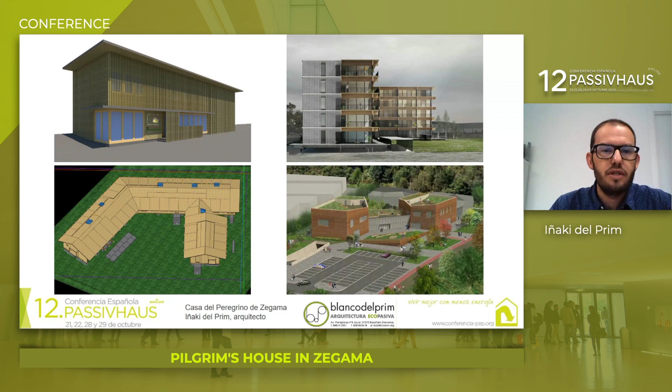This research has been carried out in 4 buildings, the first built in 2016, both our own projects and collaborations with other architects. More projects are undertaken entailing greater complexity and larger scale, using solid wood. The majority have been certified, in fact all of them, and some are in the tender or construction phase. In this case, I'm going to talk about the Pilgrims Hostel in Zegama.

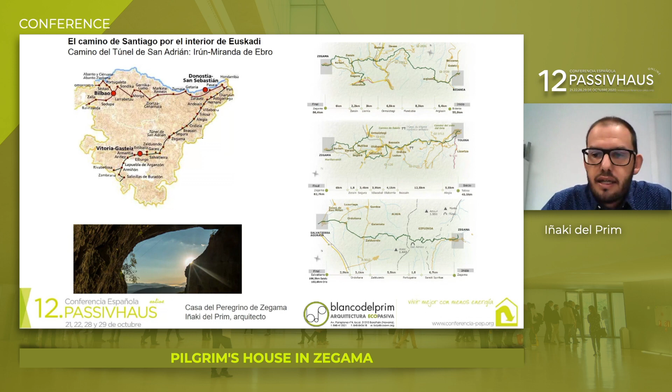Zegama's location was one of our first concerns, given its very specific climatological conditions. It's relatively close to the coast, at an altitude of approximately 300 meters above sea level. So it's a very mountainous landscape with a mountain climate.

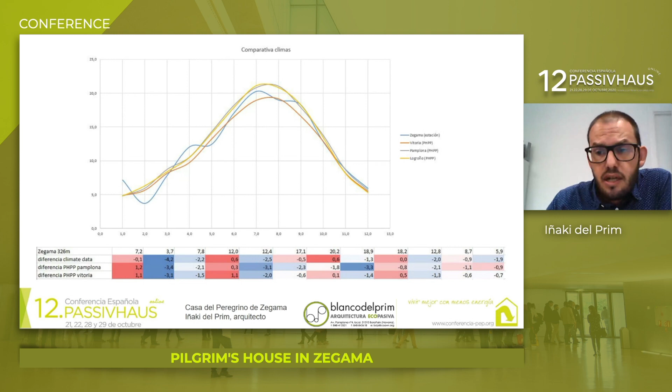We had to study the climatological conditions for this project, comparing real weather databases for Zegama with different climate profiles indicated in the PHPP and other profiles downloaded from general databases. This prompted us to determine that the climate profile in Zegama was almost the same as in Vitoria. Together with Burgos, these two areas have some of the most severe climate conditions in the Iberian Peninsula, both in terms of temperatures and radiation levels.

In terms of conditioning factors at the outset, the local town council, through work with the municipal architect, wanted the building to comply with passive house requirements to fulfill their commitment to sustainability and provide guarantees on the quality of municipal investments. Another conditioning factor was that it had to be made of wood. The plot was located next to the Wood Museum in the municipality, a museum that's fairly famous in the district. So, to complement it, they decided it should be made from local wood.

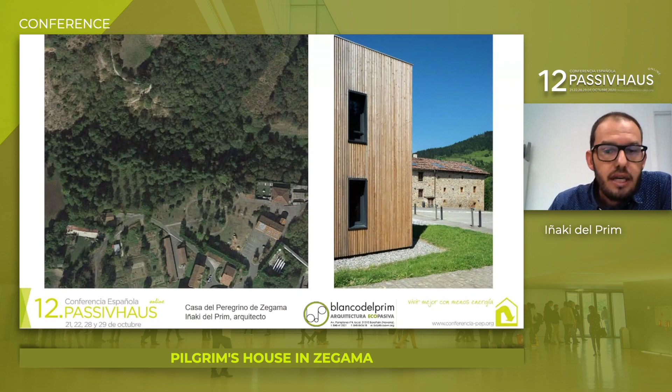It was located at the entrance to the natural park, marked there by the cursor. So towards the left of the building is the Aizkorri Natural Park, with many different paths. This building would serve as a gateway to the park, marking the beginning of the route into the mountain range of the district.

The building program was very easy to understand. It was for a pilgrims hostel, and the goal was to construct a hostel for a maximum of 12 pilgrims, with a relatively simple volume that had to be relatively economical as well.

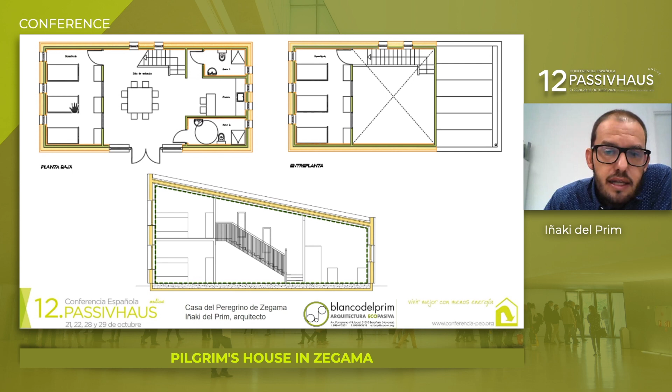The configuration of the building revolves around a central space, as you can see in the floor plans, with 2 sleeping rooms, each with 6 bunk beds, and on the right the area with toilets, a canteen, and another small room, all within a single envelope, in order to fulfill the thermal envelope needs and continuity.

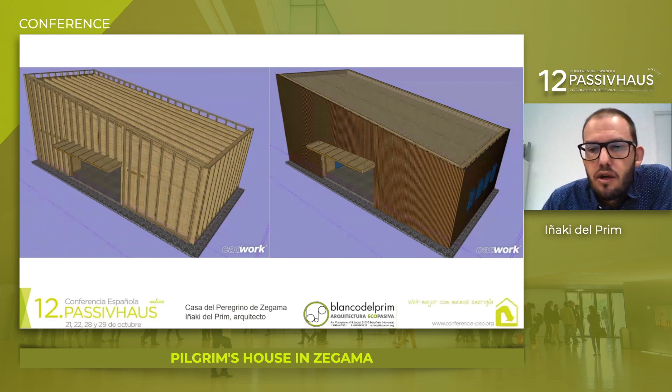As I mentioned, the building was made entirely from wood—both the structure, CLT, with local wood from Basque Country forests, and the envelope, including the insulation and cladding on the exterior and interior.

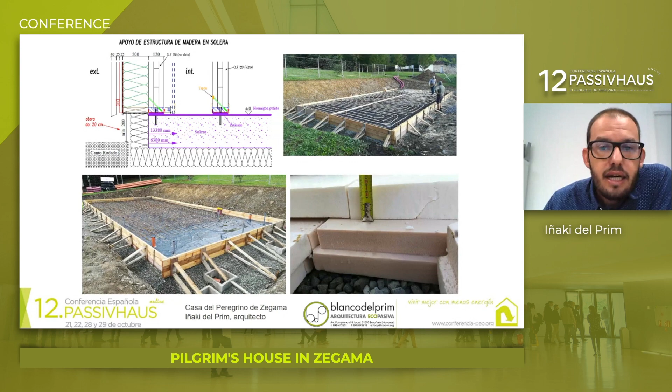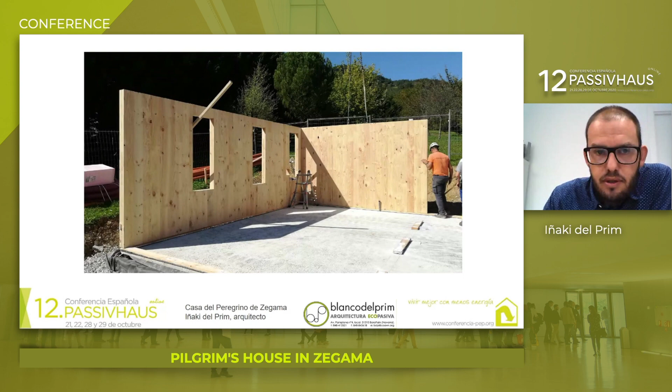This volumetric construction, made entirely from wood, was supported on a foundation slab, insulated as always from the exterior to provide continuity to the envelope, and as I'll explain later, this was an active insulation slab. As you can see in the photograph on the top right, we introduced water piping into the foundations in order to activate that slab from an energy standpoint. Here are some photographs of the assembly work—CLT, 120 millimeters, 3 layers.

We always use the same approach in our buildings. The roof is not done using solid wood, but rather light wood panels, with greater control of vapor diffusion, since that's probably where most problems exist, and also better use of the enclosure section in terms of thickness and insulation capacity ratio.

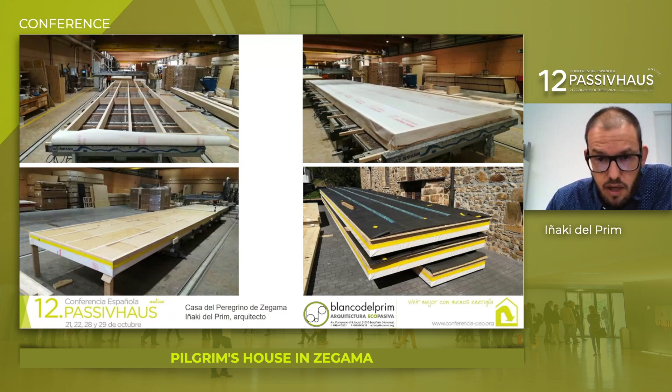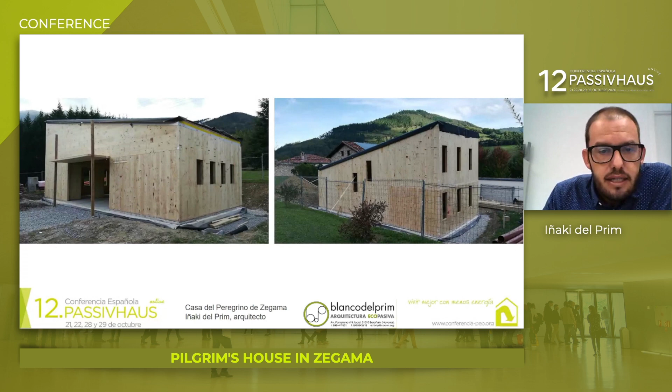These were industrial panels, 12 and 12.5 meters long, 3 panels you can see on the right at the bottom, placed on the roof of the building. There you can see the photographs - in this case it was CLT with 3 layers, and we felt the envelope needs were fulfilled with that structural layer.

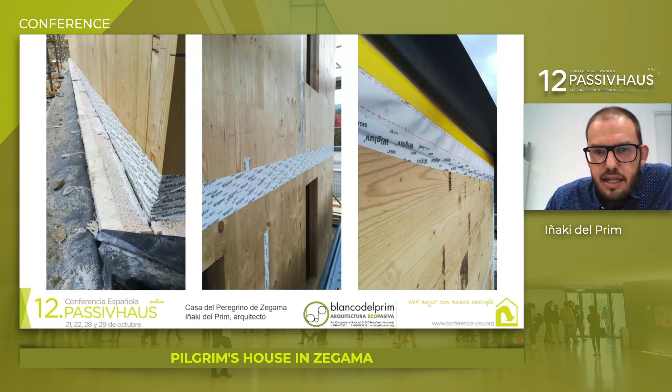The idea was to work on the joints between the different panels, as you can see in the photographs, with different air tightness elements on the roofing, combining this strategy of always trying to provide a correct approach on the interior and the exterior.

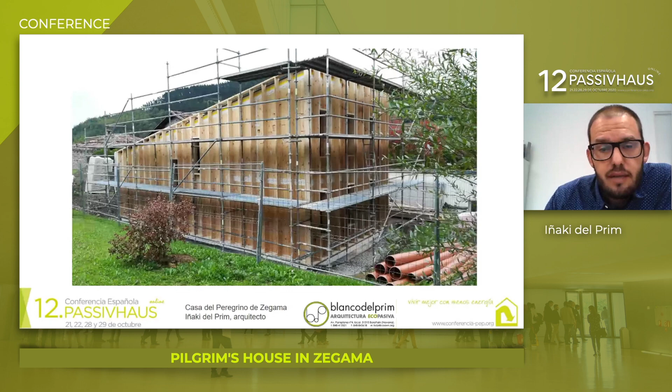There was no clear strategy, in fact. We had to adapt to the construction needs of each point in the building. So once the structure had been completed and continuity of the air tightness achieved, then we would work on the insulation envelope using these vertical elements.

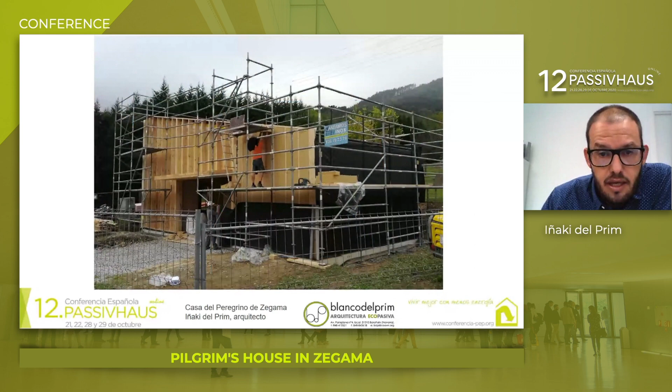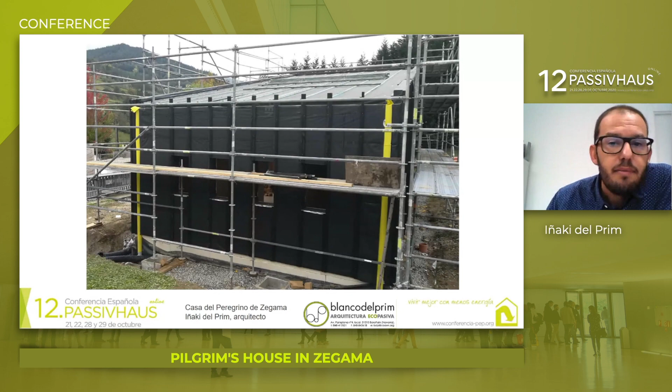These were filled with wood fiber insulation and impermeable, practical panels or sheeting on facades and also on the roofs. At the end, after the structural and hermetic line had been completed, we could work on the insulation to protect the building against exterior atmospheric agents, and then work on the exterior and interior cladding.

But we would always ensure the continuity of the envelope, as you can see in the diagrams, formed by structure and enclosures, providing continuity to the entire building envelope.

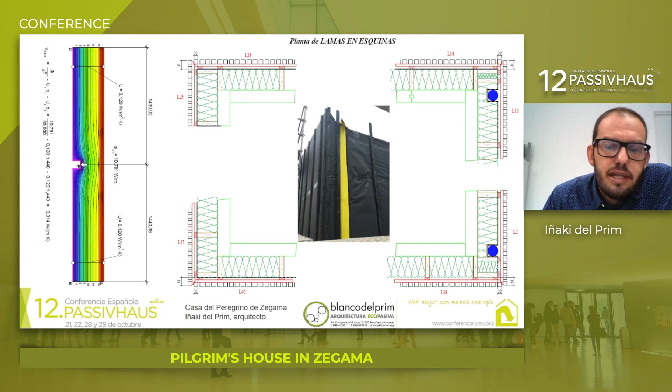In this case, the only points that would interrupt that continuity would be the downwater rain pipes, which were also embedded in this type of insulation. You can see in the thermal insulation calculation the values indicated on the slide. At the end of the day, this is a thermal bridge with low impact, which is perfectly acceptable.

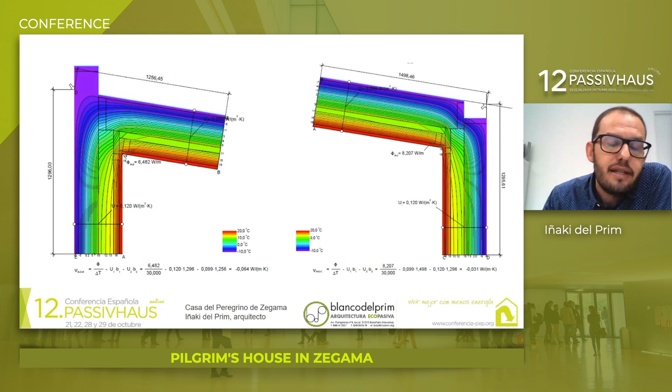Sometimes there can be geometrically negative thermal bridges, but these are not taken into account in the energy balance. In terms of the meeting point with the terrain, 0.007, and 0.005 is another important value where it passes through the flooring. The values were very low, or even negative, so it wasn't necessary to take them into account.

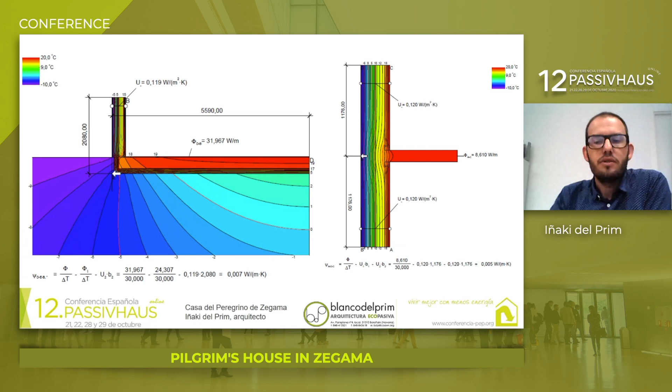As part of this research and learning process in these projects, we've managed to optimize different solutions to achieve this truly thermal bridge-free building envelope with structural and construction solutions that are more efficient and also much more aesthetic.

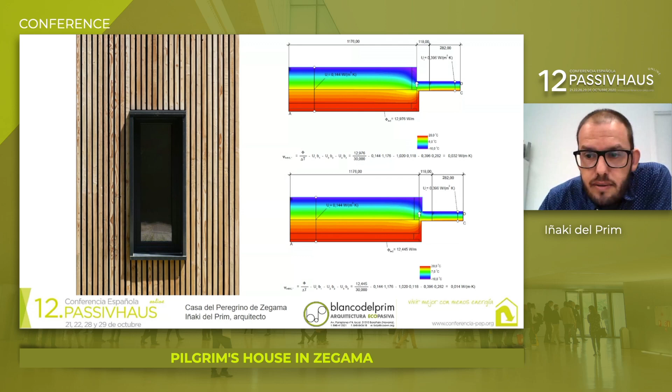In the case of the carpentry, this photograph of the window shows over-insulation without frames. The value was acceptable, 0.032. But since we had to frame these windows with special sheeting drawers or casing to provide shade, we also decided to over-insulate, taking advantage of that option, and the thermal bridges presented very acceptable values.

Here you have a photograph of the exterior. It gives an example of how this can be integrated very naturally in the environment, in the Aizkorri Natural Park, with the facade left untreated. The wood will clearly begin to adapt and age, thus adapting to the natural environment.

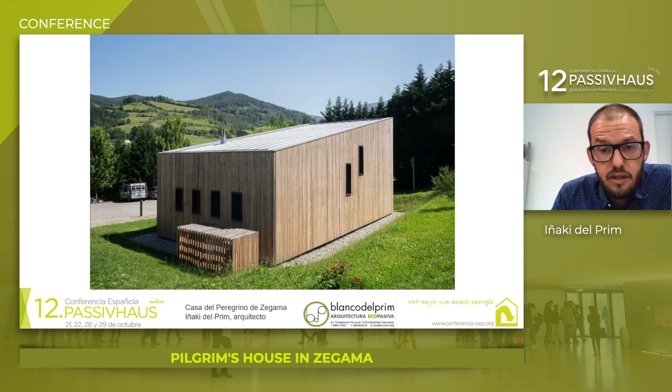Around the building, the facade allows us to resolve the entire facade and also conceal exterior installations. The idea, or purpose, here was to try to ensure the building would actually seem invisible or disappear to the naked eye and merge with the natural environment.

On the interior, as I said before, we sought a sensorial and comfortable atmosphere in material terms, using different products made from wood, with wood being the protagonist in these spaces.

You have to remember that pilgrims travel from France to Santiago de Compostela, so the idea here is that they can enjoy this experience, not just in terms of comfort and energy, but also a comfortable experience with the materials - a different experience on their pilgrimage, perhaps a little different to other hostels they may stay at along the way.

The central space with the entry of sunlight, and wood as a protagonist, but also in the kitchen, the canteen, and the bedroom areas, where wood's been used as much as possible for the shelves and cupboards, so the pilgrims can leave their rucksacks, their shoes, etc.

One lesson learned from previous projects was the difference in inertia between the foundations. In this case, it was a solid slab, 30 centimeters, insulated on the exterior below and paved directly on top, and also the lack of inertia of the light enclosures made from wood on the facades and the roofing.

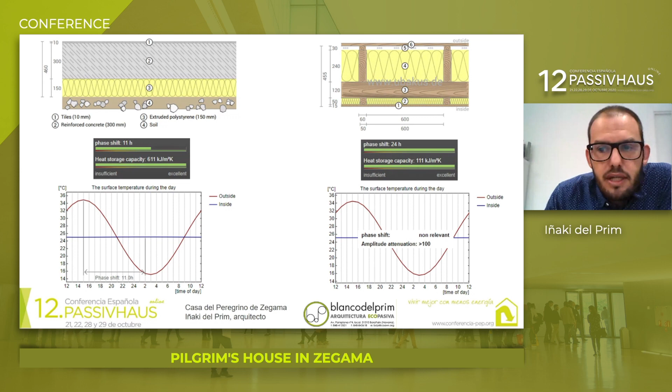That difference in phases between solid concrete and light wood, that decoupling in terms of the demands of both treatments, and the poor performance in winter of the concrete slab, which cannot adapt to temperature changes, was one of the concerns that had to be resolved. Although that may favor us in summer, in winter it penalizes us in comfort terms.

Another important shortcoming was the question of shade. The town council didn't want any type of awnings on the exterior, any elements that could be manipulated or used by users. This prompted us to use different solutions to protect against exterior sunlight on the southeast wing, like the recessed sections on the east and west openings. We knew this was going to give rise to problems.

Evidently, since there was no correct or adequate protection against sunlight on the exterior, the building would suffer from overheating. That was inevitable. This combination of decoupling in treatments, the overheating, and also the intermittent use of this building—there would be times occupied by 12 pilgrims, but other times of the year nobody or just one or two—meant the facility had to provide a rapid response, even within the same week, from empty to full at the weekend.

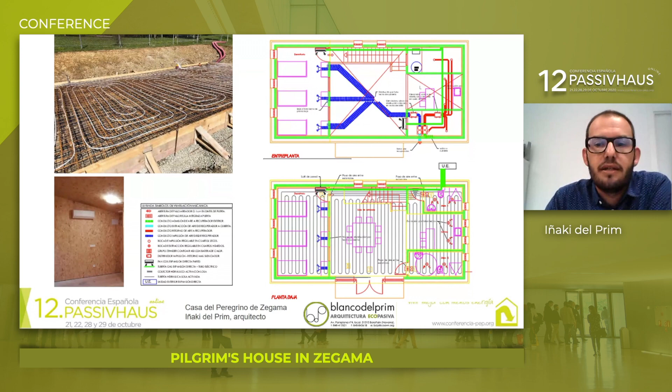As a result, we decided to promote activating the concrete slab in energy terms so that we could maintain the necessary constant atmosphere on the interior of the building, and on the other hand, an air conditioning system using a split system, which would provide necessary cooling in summer and heat in winter. This could be done on a split basis and provide a flexible solution.

And finally, the question of use. As I mentioned, maximum capacity of 12 pilgrims was provided, but in a hostel on the Way of St. James, in a small town, in a remote and perhaps less transited part of the Camino, occupancy would vary enormously even within the same week and from day to day—one day 3, 4, 8 pilgrims, or even none.

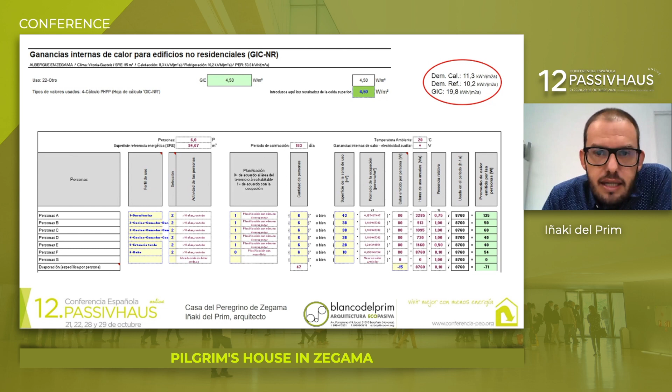So the municipality had no way of knowing beforehand how many people would stay at the hostel, making it hard to plan the air conditioning, heating requirements, and energy use. So we decided to plan different usage scenarios, as shown here. Average occupancy would be 6. You can see the values provided in the PHPP with a maximum occupancy of 12 and a minimum of 1.

At the end of the day, we decided to study these two potential scenarios, maximum and minimum occupancy and average occupancy, dimensioning the ventilation, air conditioning, and heating installations to ensure the building would always comply with certification ranges, satisfying cooling and heating demands according to the different occupancy levels and intensity of use.

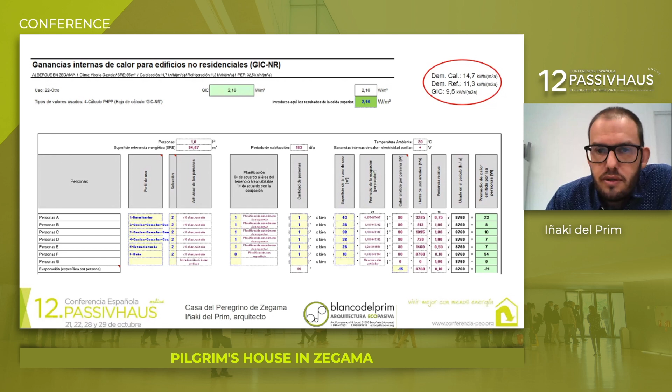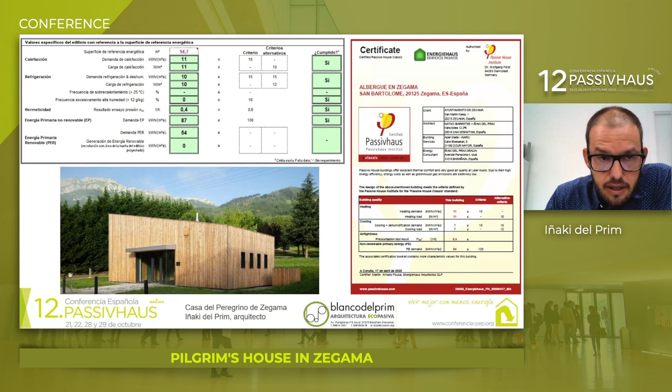It was a very interesting study. We learned a lot from previous projects, and in this case I think we resolved the issues in an optimum fashion. Finally, together with the certifiers and the Institute, we decided to certify the building with the average occupancy value of 6 users, and the slide shows the certification values we obtained in April this year.

Well, in April this year, as you know, we were all locked down. The COVID-19 pandemic had hit hard, so the building couldn't be used in full, but we did take advantage of that period to carry out monitoring studies. The building was monitored in July, and surprising readings were obtained, notably thermal variations: daily temperatures of 25 to 35 degrees and nighttime temperatures below 15 degrees on most days. So interior temperature stability was clearly reflected with respect to the variation in exterior temperature.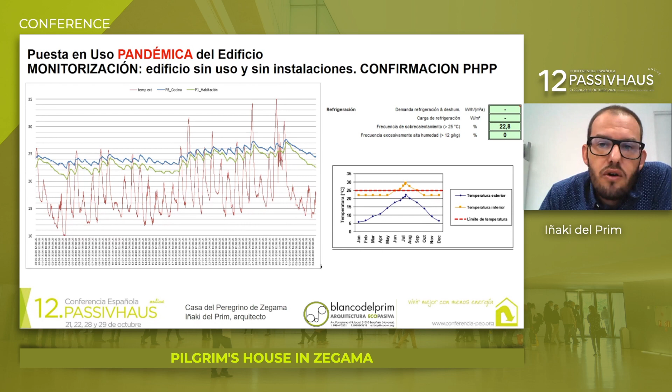One surprise initially was that on the ground floor and first floor, temperatures were high, around 25 degrees, a bit below or above. But this reflects the reality indicated in the PHPP, which showed that when the building's not occupied and not being used, with ventilation at minimum levels, as at present, or without cooling and heating, in the summer months there would also be a high level of overheating. The real results confirmed what the PHPP indicated, and this will be resolved through adequate use of the installations.

And there's not much more for me to add.